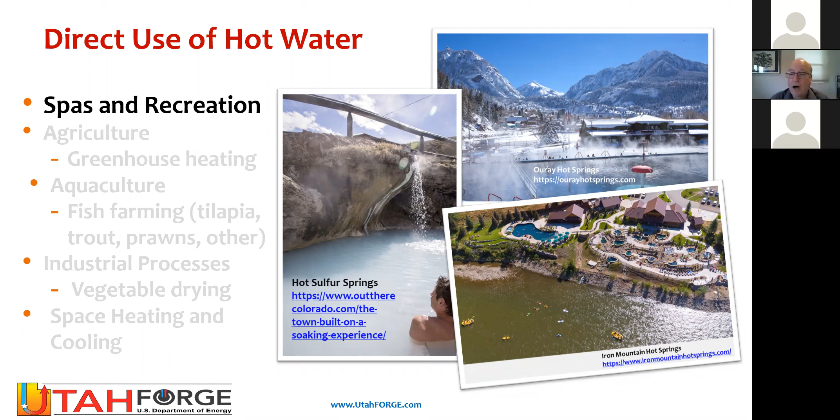Low temperature, we're certainly familiar with direct use of hot water for recreational purposes. Less so, we don't always think of it, but geothermal energy and low temperature water is extensively used for agriculture, for aquaculture, and for industrial processes. As you can see in this particular diagram, we have a greenhouse in southern Utah that grows most of the poinsettias in the United States. It's commonly used for vegetable drying and other processes like that. And if you have a Gucci bag, it may come from an alligator that was raised in a geothermal setting.

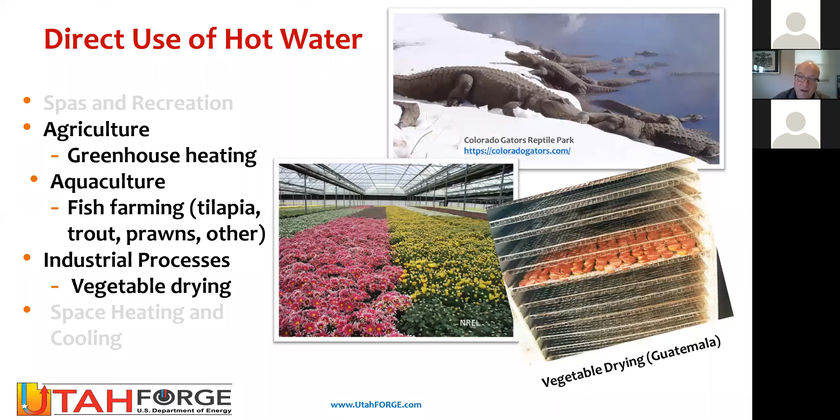The really low-hanging fruit immediately in geothermal is kind of surprising, and it's probably low temperature direct use of geothermal through ground source, where heat is extracted and rejected into the ground in combination with heat pump systems. And as you can see from these statistics here, this is growing extremely rapidly. There's at least 1.5 million units worldwide for heating and cooling, residential and commercial and industrial complexes. And one of the really great examples is in Colorado.

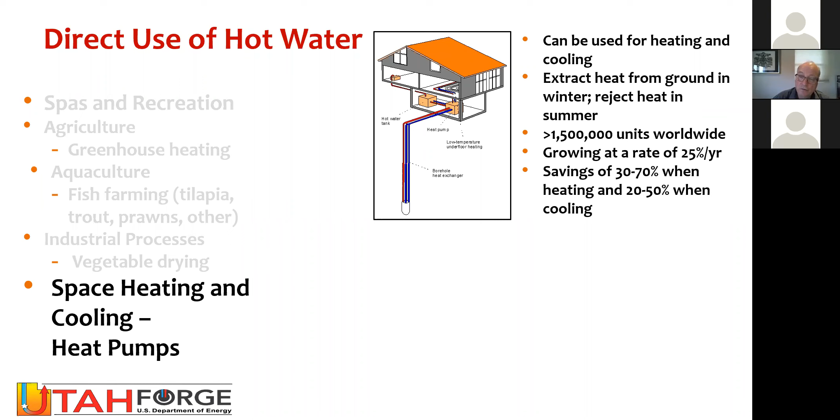Colorado Mesa University has an extensive ground loop where fluid is circulated through a heat exchange system. And in fact, at this university, they have not turned on their boiler in 10 years. And so substantial opportunities for people.

And so what I want to mention is that it's not just hot water and electricity. The low and intermediate temperature geothermal water has extensive applications and utilization for people in the geologic or energy spectrum.

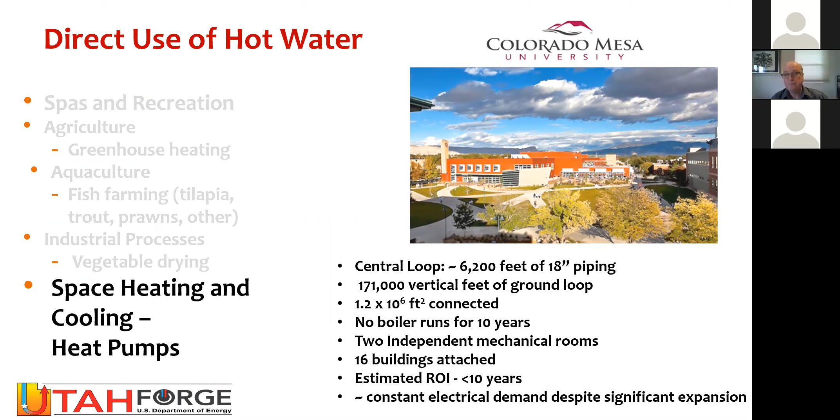We, of course, are more familiar with electrification of geothermal energy, and the advantages of this, of course, are that there are low emissions. It's a 24/7 operation so that you can provide base load power and meet peaking demands in off times. It's nominally renewable and it's vast. It's a low-cost resource once your infrastructure, your wells and your plant are established, and it has a relatively low footprint.

As you can see in the top photograph, which is a picture of PacifiCorp's 38 megawatt electric Blundell power plant in central Utah, you can see the plant in the foreground maybe occupies 5 acres, whereas a comparative wind farm in the background has a much larger footprint in a sense.

So as you can see, I've highlighted 3 geothermal power plants in the state of Utah alone. Those are PacifiCorp's Blundell plant. In the middle, Enel, an Italian company, has the Cove Fort plant, and it produces 25 megawatts of electric. And Cyrq Energy's Thermo plant, also in central Utah, produces about 10 megawatts. So in many places around the world, there are tremendous opportunities for conventional electrification of geothermal energy.

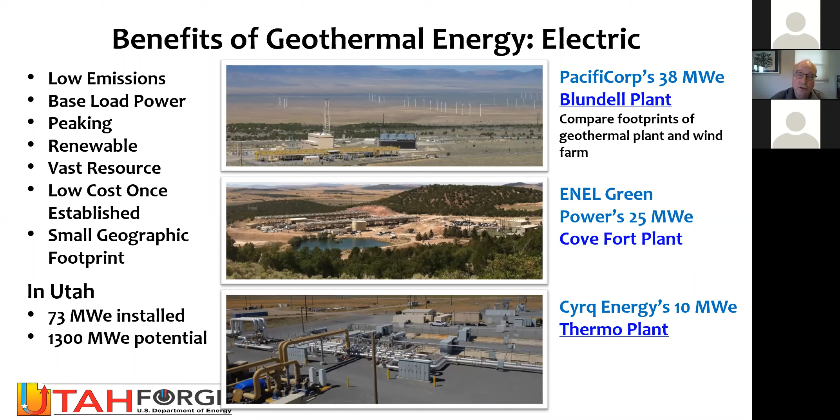Most of these locations for geothermal energy are logically associated with plate boundaries and tectonic environments where, by virtue of plate movement or other tectonic activity, there are sources of heat that are relatively close to the surface that can be accessed by relatively inexpensive drilling.

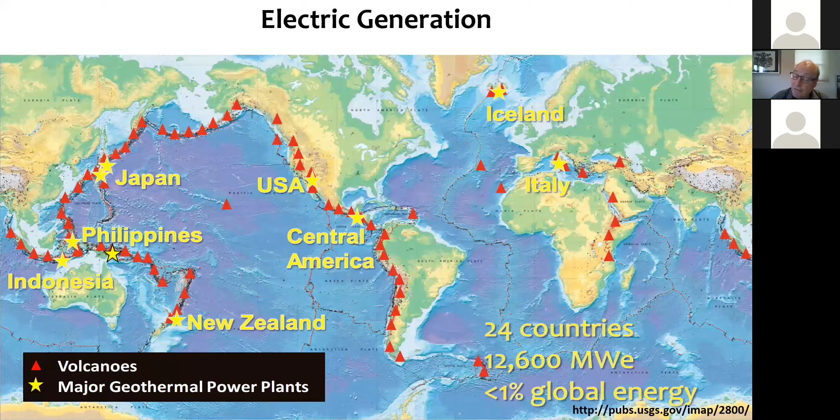And in fact, these conventional hydrothermal geothermal locations have 3 things in common. They have a heat source. As we can see, we have a geothermal reservoir that's proximal to some sort of natural heating source. They have natural fractures, as shown in the fracture at right from an operating plant near Reno, Nevada. And they have in situ heated water that can be convected through these natural fracture systems into a wellbore and to the surface to some sort of a power plant.

So as we can see with the schematic on the left, we have a convecting situation where heated water is moved through natural fractures, and these natural fractures are intersected by relatively shallow open boreholes, or at least partially open boreholes, which produce through the fractures to the surface. They produce steam or hot water, which is either flashed and drives a turbine, or it's run through some sort of an organic Rankine cycle binary power plant where there's a secondary heat extraction and conversion to electricity.

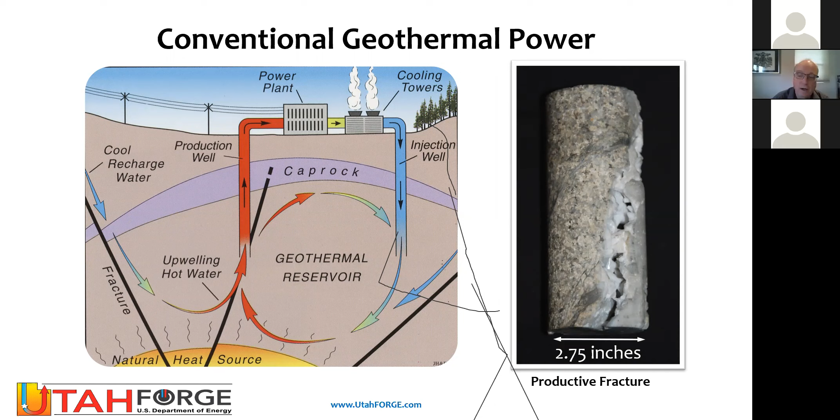So what are the characteristics of these conventional geothermal systems? The characteristics are that we have a large in situ volume of heat, and we also have to produce large volumes of heated water. The message here is that compared with a barrel of oil, which can be combusted to create energy, the energy density of a barrel of water is substantially less. So to create the same amount of energy, you need much more water to run through your power conversion operations.

And this water in these conventional geothermal plants is transferred by convective heat transfer through natural fractures. These extensive systems of natural fractures are high permeability. And there's a few plants that have multiple wells that can produce on the order of what a nuclear plant would do. That's approximately 800 megawatts. The Geysers in particular in California is noteworthy. On average, an average well might produce 6 megawatts of electricity. There are some extremely substantial wells that may produce up to 50 megawatts of electricity.

And just to put that into perspective, let's see what you need in terms of your volumes. So at 392 degrees Fahrenheit, 200 C, and sort of the limit for a binary power plant is maybe 150 degrees C, although more and more those limits are pushed lower. A megawatt from a flow rate of 365 gallons per minute will service maybe 750 to 1,000 homes with the typical demand in the United States. And so 365 gallons a minute is what? That's like 9 barrels a minute. And so it's not too substantial, but it's reasonable.

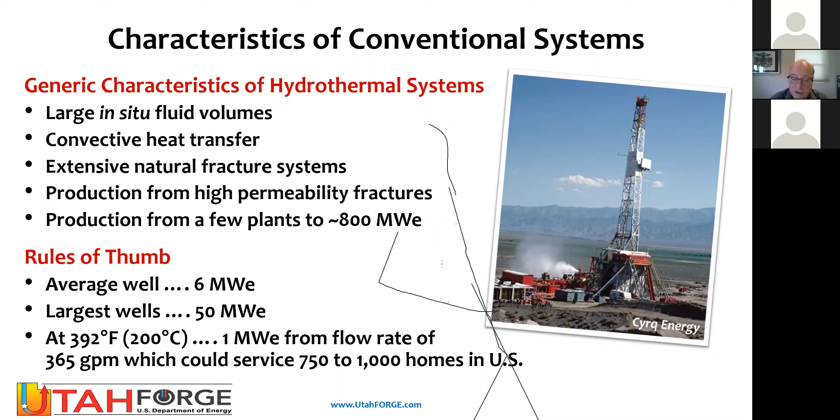And I really don't know why. I don't know whether your screens are seeing it, but I'm seeing some odd lines on the screen that I have here.

So we're getting Zoom bombed or something.

But nevertheless, these conventional geothermal systems, what do they need? They need heat, they need fractures, they need water. Now, this is a difficult combination in much of the continental United States.

And so how can we take geothermal energy and move that geothermal energy to a larger geographic part of the United States? Well, heat, fractures, water. Are there parts of the country where we have some of these? Well, yes, indeed.

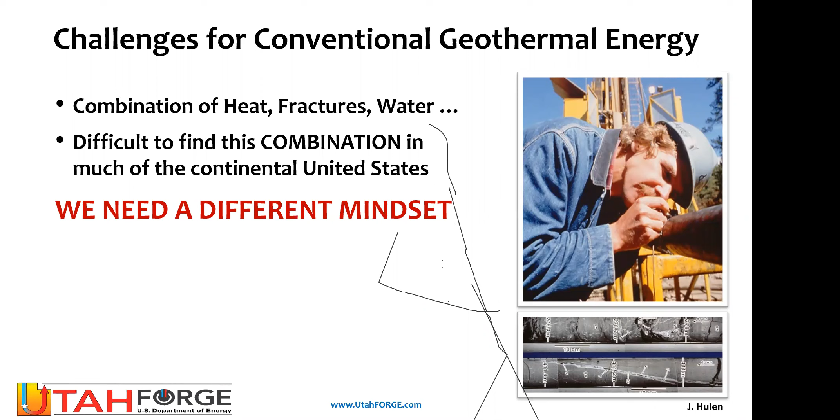And if we take this further and give ourselves the challenge that we want to create the other 2 elements, we have heat, but we want to create fractures and circulate fluid through those fractures, then we can develop what is called an enhanced geothermal system.

This entails drilling an injection well, hydraulically fracturing that injection well, and drilling a production well to intersect those hydraulic fractures so that you've created a heat exchange system where fluid can be pumped down the injection well. It passes through a series of hydraulic fractures, picks up heat, and is produced up to the surface, subsequently flashed to steam to drive a turbine and generators.

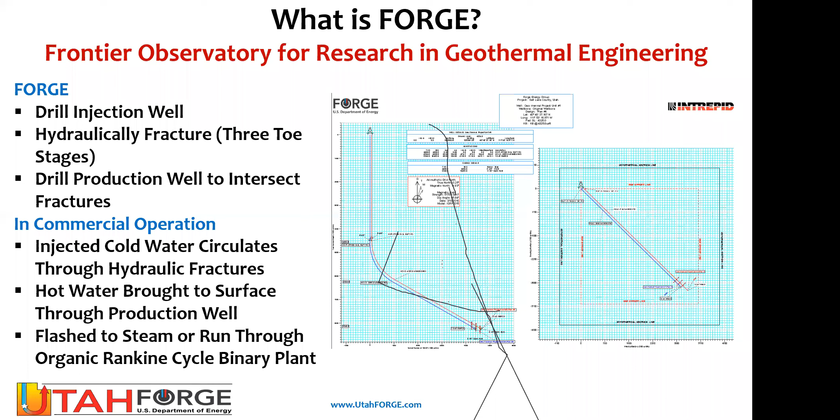Recognizing this and the opportunities associated with it, the Department of Energy, about 5 years ago, conceived of the FORGE program. Initially they developed 5 sites where paper studies were done: a couple in California, one at Fallon, Nevada, one on the Snake River Plateau in Idaho, one at the Newberry Volcano in Oregon, and the Utah program in central Utah. In 2016, this was down selected to 2 locations, Fallon, Nevada, and Milford, Utah.

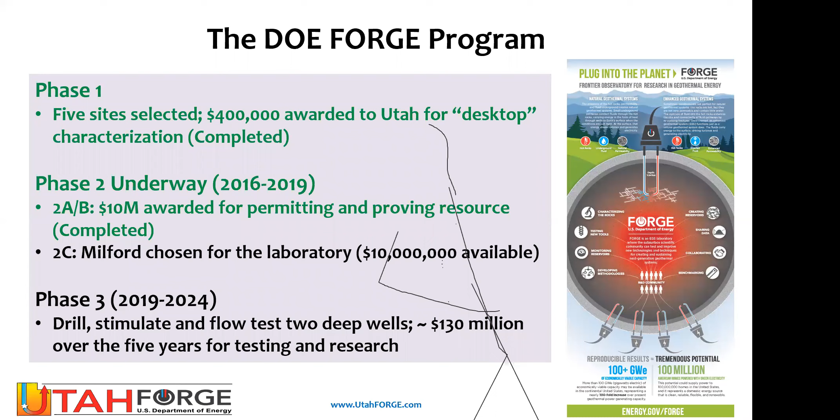Each location drilled a scientific well and established the merits of the individual site for geothermal energy extraction and for a research laboratory. Ultimately this was awarded to the Milford site, and this is $130 million expended over 5 years. That $130 million involves developing the infrastructure and research money that would go to use the unfractured portions of these wellbores for Department of Energy awards to study hydraulic fracturing, logging, isolation methodologies, etc.

So the concepts of FORGE and the criteria for FORGE basically are: you need temperatures greater than 350 degrees Fahrenheit at depths greater than 5,000 feet, but not substantially greater, so that operational expenditures will be minimized. That's definitely a criterion met at the FORGE site in Utah.

These rocks need to be low permeability granite. It needs to be a thermally conductive regime rather than a thermally convective regime, which is associated with conventional geothermal. One of the number one criteria is that there needs to be a low risk from induced seismicity. And this site actually meets those criteria.

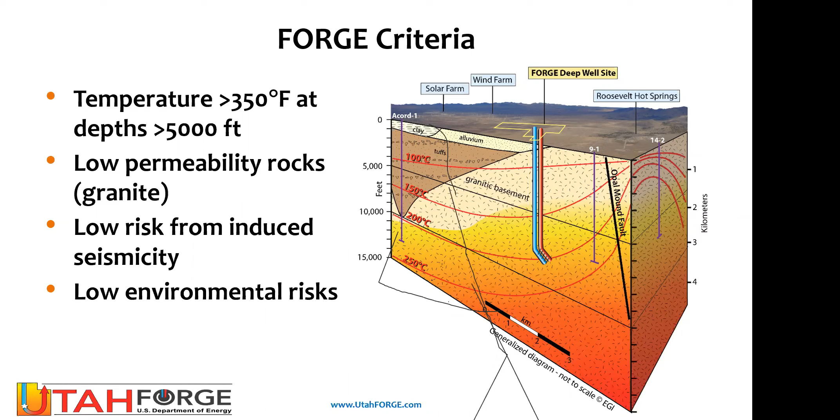It's been monitored by the University of Utah for about 30 years because of potential for earthquakes, and this is a relatively aseismic region that meets the seismic criteria. Low environmental risks are also needed, to minimize any environmental risks associated with surface use and competition with agriculture and other ground use.

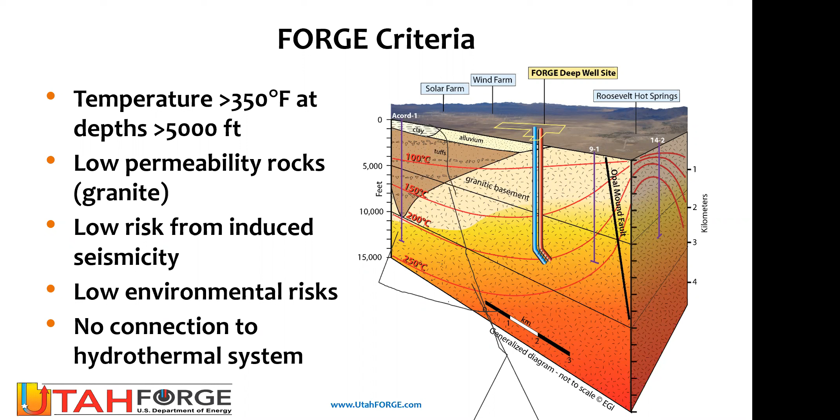As I mentioned earlier, with the thermally conductive situation, there is no connection to a hydrothermal system. And in fact, the location in central Utah shown here met all of those criteria.

The state of Utah likes this location because it falls within what they define as Utah's renewable energy corridor, where in the immediate vicinity there are 3 geothermal fields, a large wind farm, 2 solar fields, and a biogas facility, because nearby there are about 500,000 hogs within about 20 miles being raised primarily by one of our partners, Smithfield Corporation.

The waste from those hogs is used for generating biogas. Immediately around the facility we have 3 plants: Cyrq's thermal plant, the Blundell plant, which is within 4 kilometers of Forge, and relatively close by is Enel's Cove Fort plant. Those plants are hydrothermal, but it turns out the specific geologic regime in our location is a conductive thermal environment.

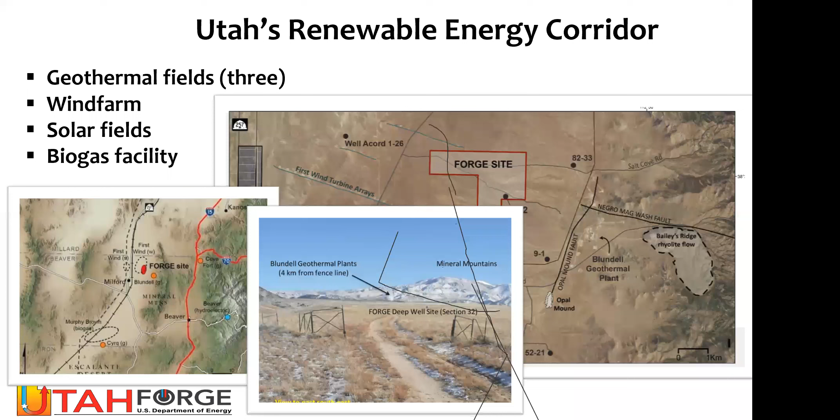As you can see from the location photograph, taken maybe 5 or 6 years ago before any activity, there's relatively little environmental disturbance. We've done NEPA surveys and archaeological surveys, and it turns out from all perspectives this is a very favorable site: no endangered species, no nearby human activity, and the shallow groundwater is non-potable.

Since 2017 we've drilled 3 wells, including 1 vertical scientific well to about 7,500 feet. That was a barefoot completion, with the bottom 200 feet left barefoot, and we carried out a lot of in situ stress measurements in that section. Last year we perforated 2 zones of the well and carried out DFIT and larger scale injection tests to confirm proof of concept for injectivity into these wells.

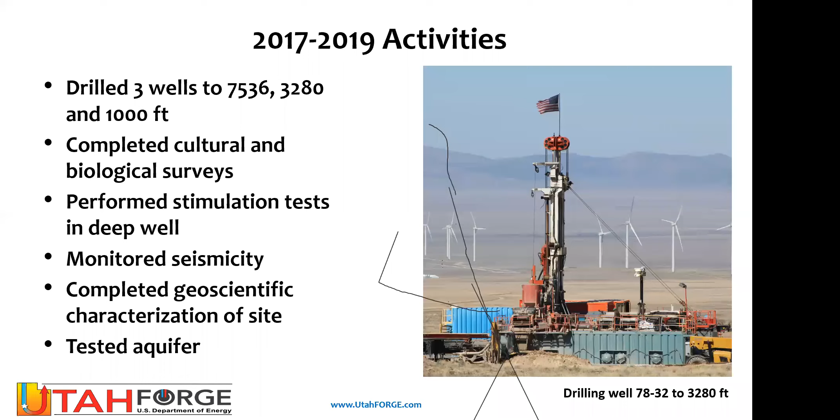Those were the activities in the early years, and now we're proceeding with developing infrastructure and monitoring systems, particularly seismic monitoring systems, not only for hazards but for microseismic monitoring while we're fracturing, so we have some idea of the morphology of the fractures.

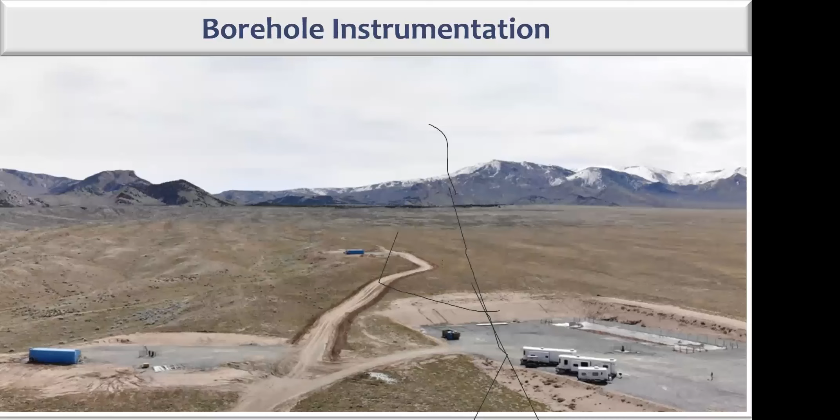This photograph, looking east, shows the situation maybe last May, with one relatively shallow monitoring well with a geophone and an accelerometer at its base, in alluvium. The geologic setting has approximately 3,000 feet of alluvium before the granite contact, derived from erosion of the mountains to the east, shed and deposited above the relatively young granite contact.

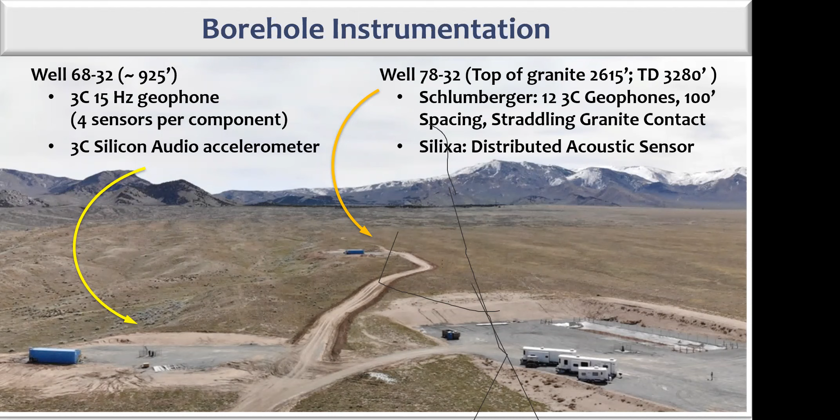So one set of sensors is in the alluvium. The well known as 7832 is drilled into the granite by about 600 feet. This past year we monitored activity with geophones straddling the contact, 1,200 feet of geophones, 12 geophones 100 feet apart, straddling the granite contact. In this well's annulus we had distributed acoustic sensors cemented in the backside.

The primary well we've been working on for the last 2 years is designated 5832. It was drilled to a depth of 7,536 feet. We will use this as a monitoring well going forward. The temperature at 7,500 feet in this well is about 200 degrees centigrade.

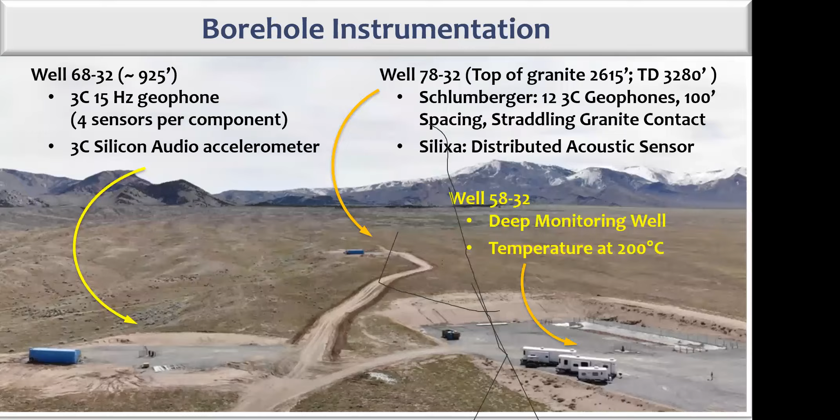In the immediate future we're developing drilling plans to drill the 2 horizontal wells I've talked about. The first well, designated 16A 7832, will be drilled vertically, then at a 65-degree tangent just south of east at 65 degrees to the vertical, bypassing the 7,500-foot deep well, 5832.

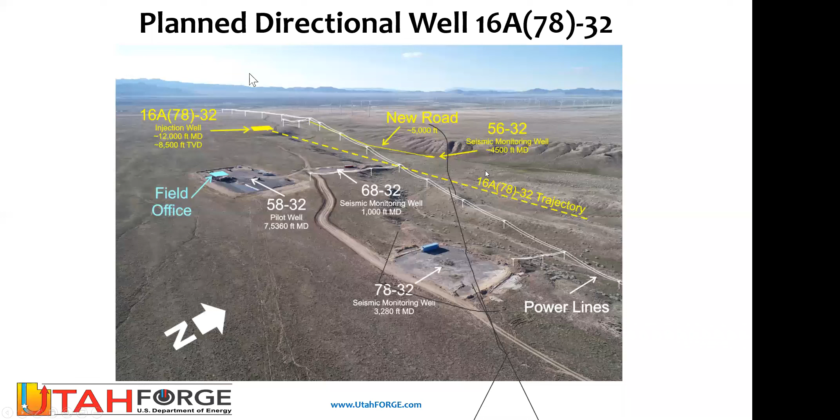It's relatively proximal to the seismic monitoring well 7832 and close to the shallow well 6832. In the very near future we're drilling a second monitoring well, 5632, which will go to a depth of about 4,500 feet.

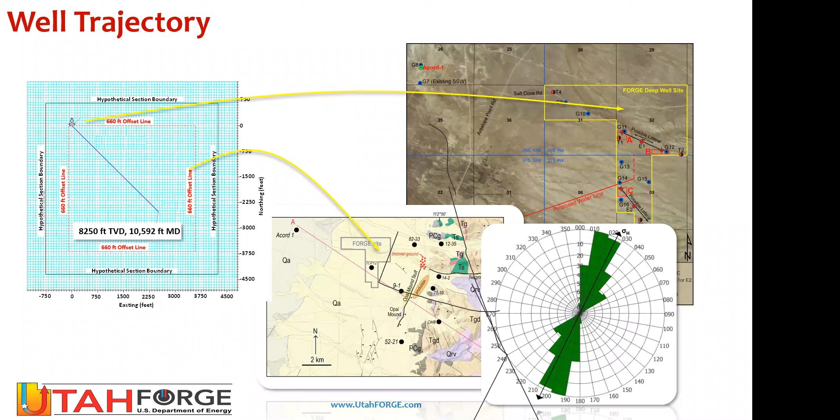The directionality of this well is geologically dictated so that its trajectory is perpendicular to the maximum principal stress, consistent with hydraulic fracturing experience, drilling so that fractures propagate orthogonal to the well. This is based on geologic mapping and insights over the past 15 or 20 years, in a range extensional setting, and on an FMI log where drilling-induced fractures are shown on the Rose diagram at bottom right. We will drill perpendicular to the trends of the maximum principal stress.

So it sounds pretty straightforward. Well, the problem with this is that people have been trying to do this for 50 years.

It started with the Fenton Hill experiment in Los Alamos, New Mexico, which was a scientific success. It went on to Rosemanowes in Cornwall, Soultz-sous-Forêts in France, which is actually generating a small amount of power, experiments done in the Cooper Basin, and recent experiments done in Pohang, Korea.

So there are some obvious technical challenges that DOE has identified because of the difficulties encountered over the last 50-odd years where people have been working on enhanced geothermal systems. The opportunities we have now are exploiting directional drilling, hydraulic fracturing, and isolation technologies that have been adapted from the oil field to do this.

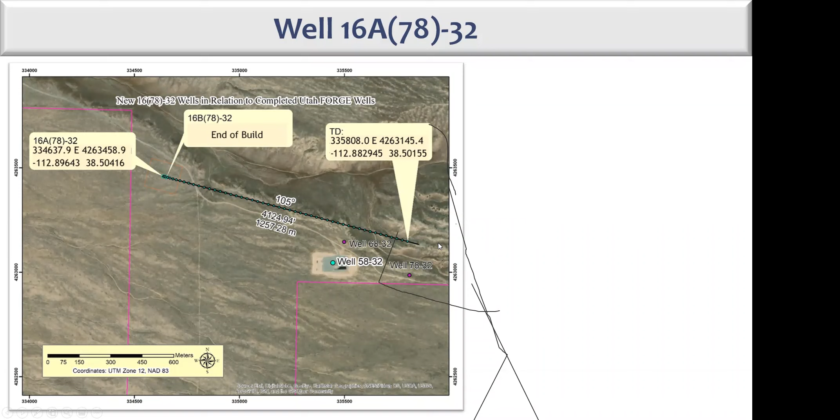So we will drill the first horizontal well, probably starting in about July this year, starting from the west, drilling to the east, orthogonal to the anticipated direction of maximum principal stress. This is a cross-section of what the well will look like. It's drilled down to a depth, and we're drilling at 65 degrees.

65 degrees is a depth where we may still be able to run wireline logs on bogies without having to tubing convey them. We'll see. And that's why the 65-degree depth was selected rather than an even greater inclination from the vertical.

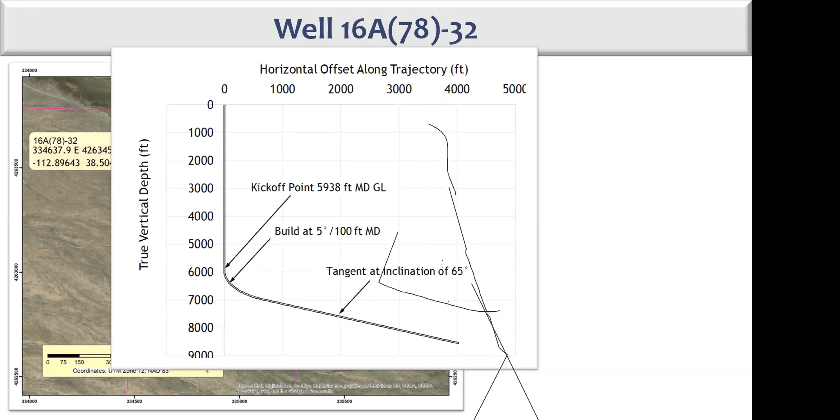There's a lot of completions discussion on this well, just because of the temperatures involved and the potential multiplicity of service conditions that this well can see. Originally it will serve as an injector, but after both wells are in place and connected, there is a possibility that circulation could come from the second well into the first. So you have to design the expansion and contraction of the pipe to take that into account.

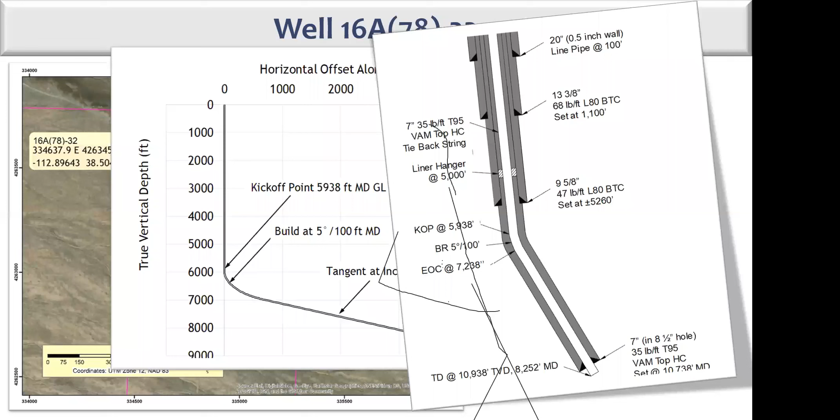And this is why there will be a liner hanger and cemented liner, 7-inch liner below the hanger, and cemented 7-inch tieback above the liner. So relatively, it's a standard oil field completion, but adapted to a geothermal environment. The upcoming activities will be that we will drill and steer 2 highly deviated wells.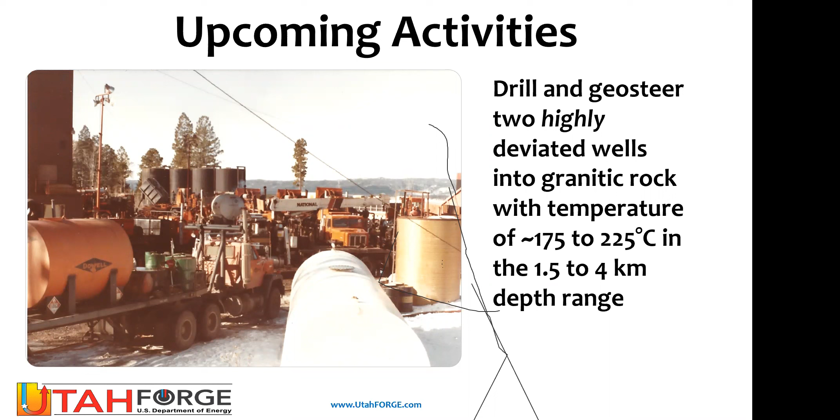So there's still lessons to learn, but the principle of Forge is that we will drill the first production well. We will create 3 moderate-sized fractures right at the toe of this well, probably using slick water, possibly using lower rate injection in one of the stages, and possibly using a large cool-down pad and a cross-link fluid in one stage. That's yet to be decided.

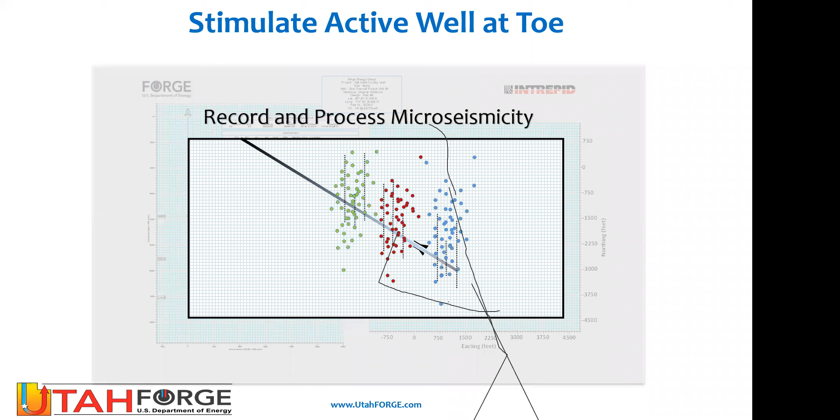That's down the line. We will monitor the microseismicity of these wells and drill into the cloud, and hopefully we will have intersection with the fractures. If not, there'll have to be remedial work on both wells to create the interconnection. So you have 2 wells that are interconnected, and you've established this interconnection between them.

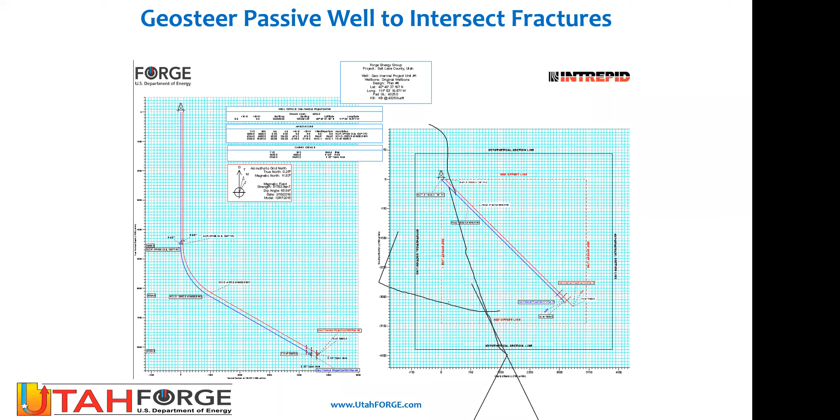What that leaves is the rest of this real estate along the length of this well for the Department of Energy to issue solicitations for people to use these wells as a field laboratory, testing out hydraulic fracturing technologies, monitoring systems, packers, and other isolation systems. So there are a lot of technical challenges associated with this type of situation.

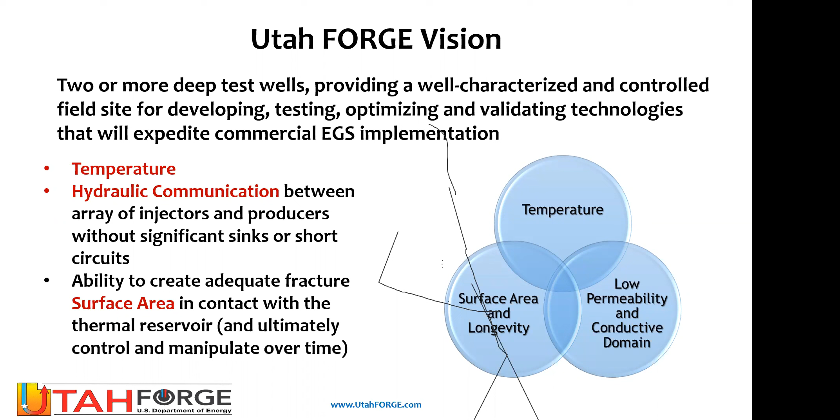And the situation is well demonstrated by this Venn diagram that was conceived by Bill Dershowitz from Golder, that these enhanced geothermal systems are an intersection of temperature, an ideal surface area situation, and a low permeability conductive regime. And to get that, you have to face some challenges, and the temperature challenges are high temperature. That high temperature definitely affects your drilling and your completion technologies.

Drilling in these granitic wells has historically been extremely slow. People have felt happy when they've been drilling 10 feet an hour through these granites, bits lasting 40 hours. And so one of the real challenges with these operations is improving drilling technologies by bit selection, improved motor performance at higher temperatures, and definitely application of technologies such as mechanical specific energy.

Logging, same issues, is that conveyance is going to be an issue. Ideally, we can run these wells on bogies or possibly on tractors, but they may have to be tubing conveyed. Through tubing logging is available. And so ultimately also thermal management and making sure that the depletion lasts over the amortized life of these wells, which for geothermal, unlike oil and gas, it's a 30-year amortization period that is required.

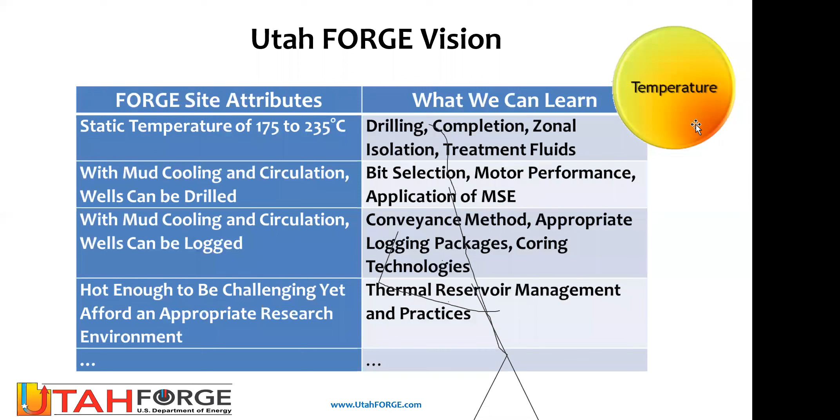And so drilling, huge challenges. You can see a tricone that was used and the wear on this tricone bit. And what we're really trying to do is introduce concepts from the oil and gas industry that were based on mechanical specific energy, looking at optimizing the amount of energy that is expended at the bit. So this is going to be a real opportunity in these particular wells.

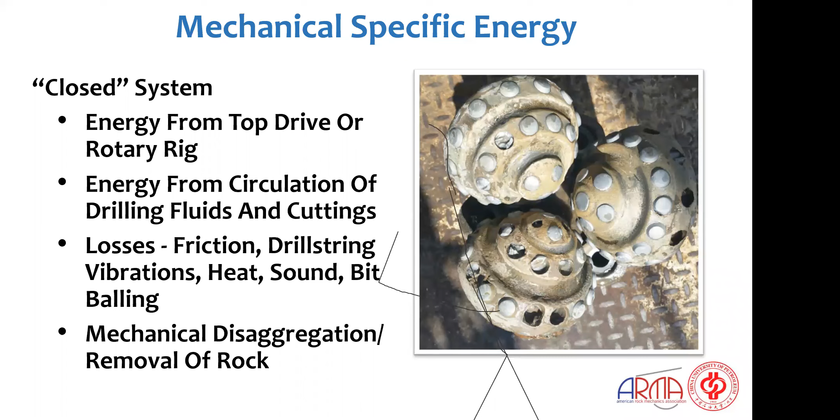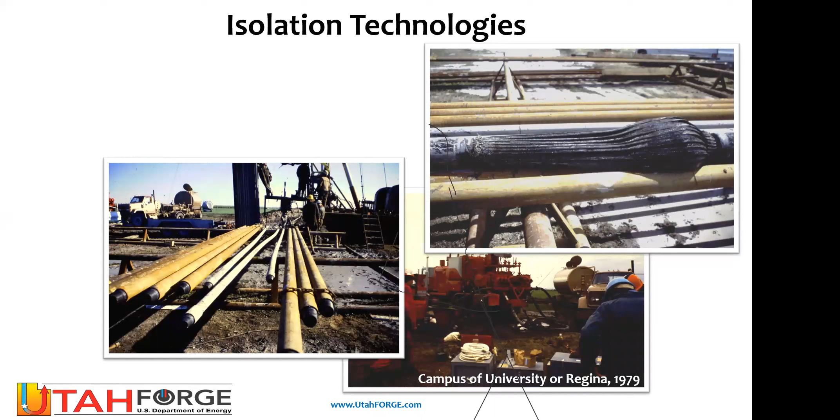We're also interested in isolation technologies. These high temperatures and relatively high pressures to break down these granitic formations require very, very stout isolation technologies. This is a picture in the upper right of an inflatable packer that failed. That probably failed right about at operational conditions, possibly right near operational conditions. But what we've experienced at the Forge site is we've experienced mechanical packers failing much below operational conditions.

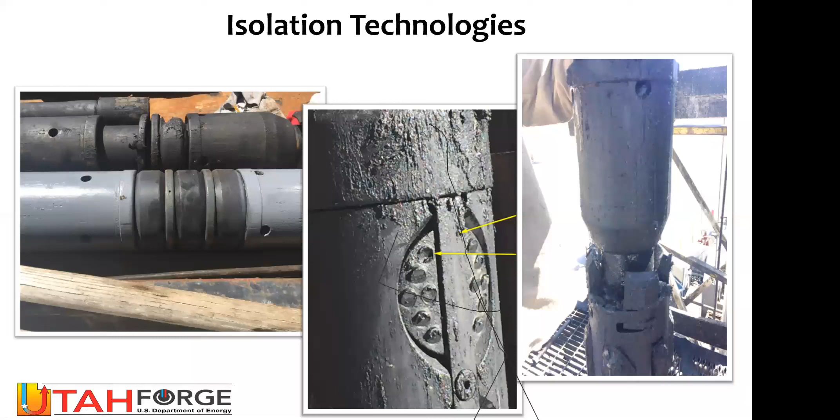So what you can see is packer rubbers in the left-hand photograph. Here is a virgin packer, and here is one that failed much below advertised specifications for the packer. Not only the rubbers, but also the dogs and the slips have failed in these packers. And here's actually a picture of the rubber coming out of the hole. So you have to be able to isolate in these situations, because you have to be able to create multiple hydraulic fractures. And so isolation technology is a big area of research that is prompted by the high temperature environment.

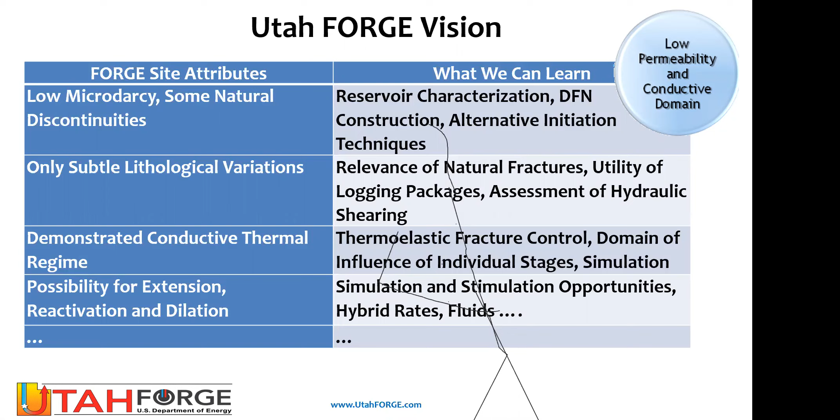The other requirement is that significant reservoir characterization is required, because even though it is a conductive regime, there are a multiplicity of natural fractures that are present. So extensive identification of these natural fractures and modeling these natural fractures, there's significant opportunities for modeling discrete natural fracture networks with sophisticated porothermoelastic considerations. You can ask yourself many geomechanical questions in these.

What kind of fracture systems am I creating? You know, some of the incipient natural fractures are not preferentially oriented. So are they going to propagate in shear? Are they going to self-propagate? Or do they ultimately become effective wing cracks, as shown here? Very good work done by Ghassemi at University of Oklahoma and his students in terms of understanding this. So with the monitoring and the experiments going on in this well, there'll be possibility to identify fracture propagation mechanisms, numerical modeling.

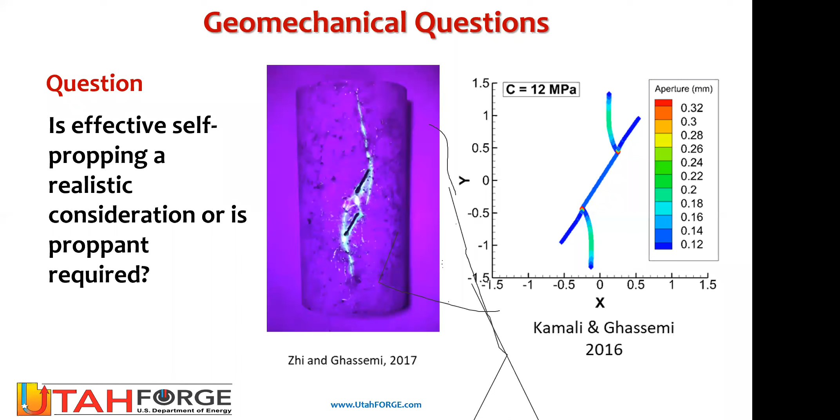We've carried out a lot of injection tests on these particular wells, and we've looked at a number of things in terms of trying to understand DFIT technologies and actually trying to replace DFIT technologies with some flowback technologies that have been talked about by people from SINTEF and certainly by Savitski and Dudley at Shell, where flowback offers the opportunity to do a stress measurement program in a couple of hours as compared to maybe 21, 25 hours that we had to let this shut in for a DFIT measurement.

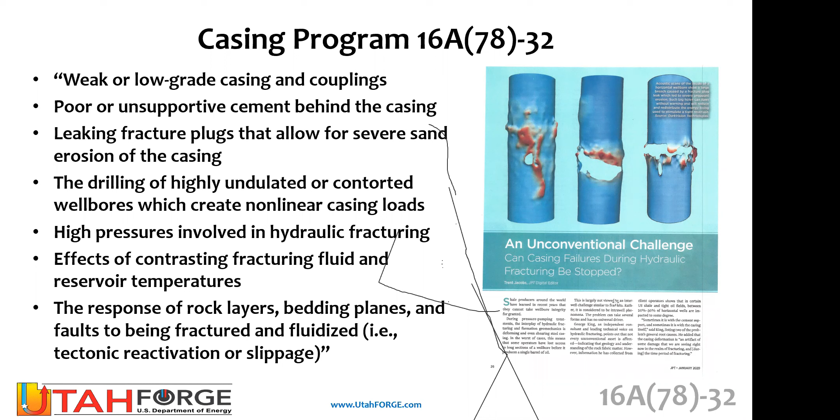So this is a situation where we have the opportunity to test out geomechanical concepts, measurement concepts, stimulation concepts, and we're adapting petroleum engineering technology, and we're very, very conscious of what people have learned in the petroleum industry, and particularly lately in terms of designing our completions, where there's a real sense now in the petroleum industry of the difficulties that have occurred with poor cement jobs. And so we're really trying to pay a lot of attention in terms of designing these wells and implementing cementing and completion technology.

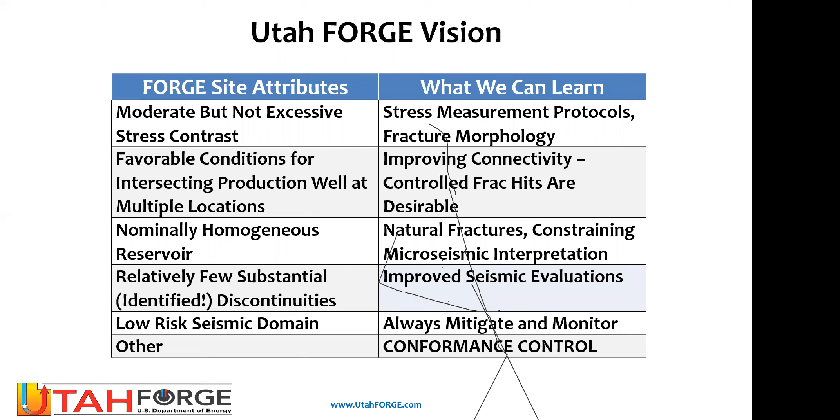So I think I've basically talked about this, but bottom line from all of these learnings is that one of the things that we're very, very interested in is developing methods for conformance control. Because you have N fractures along the length of this well, how do you control where the fluids go into these fractures? And so that is a big deal.

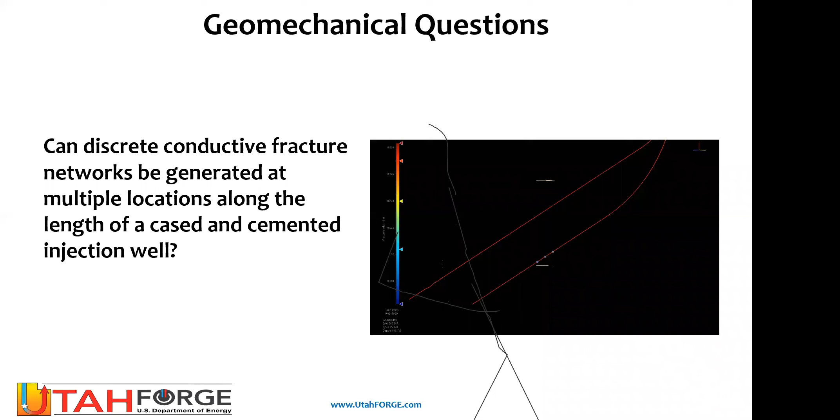So geothermal questions, geomechanical questions: you want to know whether you can create discrete conductive fracture networks at multiple locations. That's one of the #1 geomechanical questions. You do not want short circuiting. You do not want substantial interaction between these two fracture systems. Secondly, can these conductive fracture networks propagate independently? And as I mentioned, avoiding substantial interaction between the fracture systems, interconnections that minimize the surface area that you encounter.

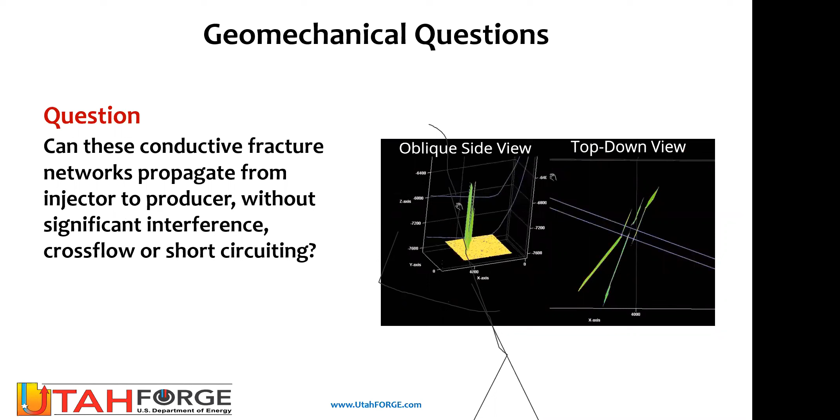So technical geothermal questions. Always in the back of our mind, though, is induced seismicity and creating seismic events that are undesirable. So safe operations are the #1 primary concern, watching for hazards, seismic hazards. We will use the acoustic active and passive events to comprehend the reservoir and the fracture morphology, but we're conscious of induced seismicity. One of the real examples for this is Basel in 2006, where they weren't extremely large seismic events, but they brought to mind the events that occurred in Basel in 1356, where the entire city was destroyed by, I think it was in excess of a magnitude 6 earthquake.

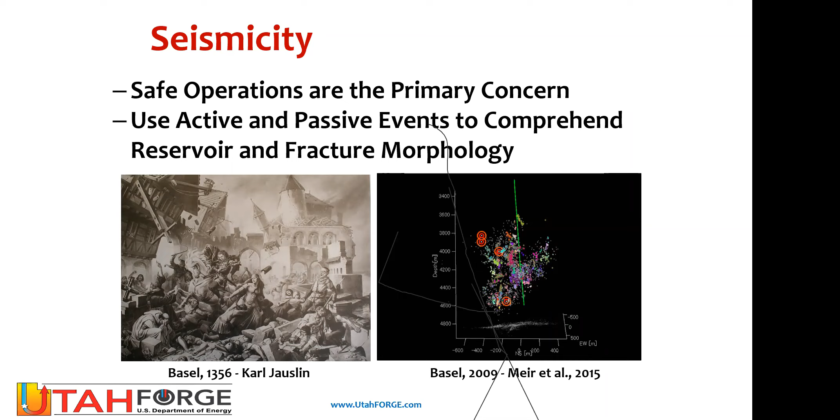And so in situations where you have the potential for shear motion, you have the potential for seismicity. This energy expended during hydraulic fracturing is always consistent with some level of microseismicity. The challenge is to mitigate this and to find geologic regimes where it is acceptable.

The second and final engineering challenge, as I wrap up here, is controlling the flow through these fractures. This may be the greatest challenge that we have. So we can see this schematic flow here showing nicely through a fracture, beautifully intersecting a production well, that you flow fluid through a fracture system. You extract heat convectively, conductively into the flowing fluid. It's produced out the producing well and goes to the surface to produce electricity.

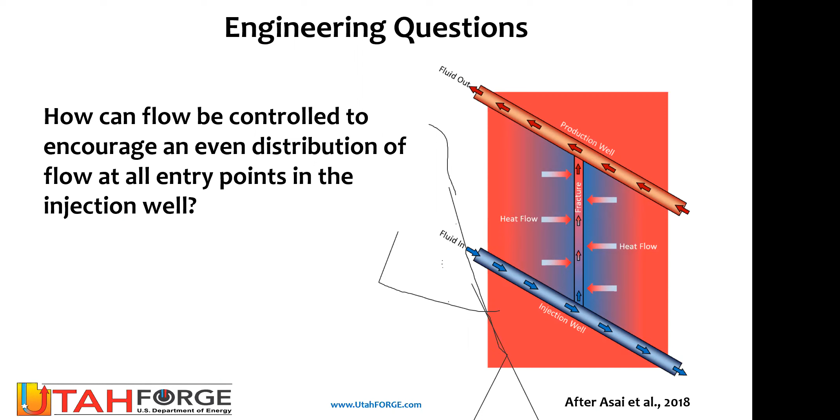But let's take another schematic and let's look at this from the point of view where you have multiple fractures existing in your system. What happens in a system where you're injecting, where there's a multiplicity of fractures? Well, the situation is that dominantly, just strictly on the basis of fluid mechanics and viscous losses that are going to occur in these fractures, preferentially the fluid will go through the first fracture that it sees.

And unfortunately, in geothermal situations, it's catalytic, because as I flow fluid through that fracture system, at least part of that fracture system will be cooled. And as that fracture system is cooled, thermoelastic coupling causes an increase in aperture of that system, and preferentially more and more fluid will flow through. So one of the real challenges is mechanical control of fracture systems or chemical control through diversion of one form or another.

And so to conclude, this is a tremendous opportunity for the geothermal community, for the geomechanical community, for the oil and gas community to look at exploration technologies, characterizing reservoirs, reducing drilling costs, and all sorts of things that are indicated on this list. So a fantastic opportunity that the DOE has envisioned and put into place.

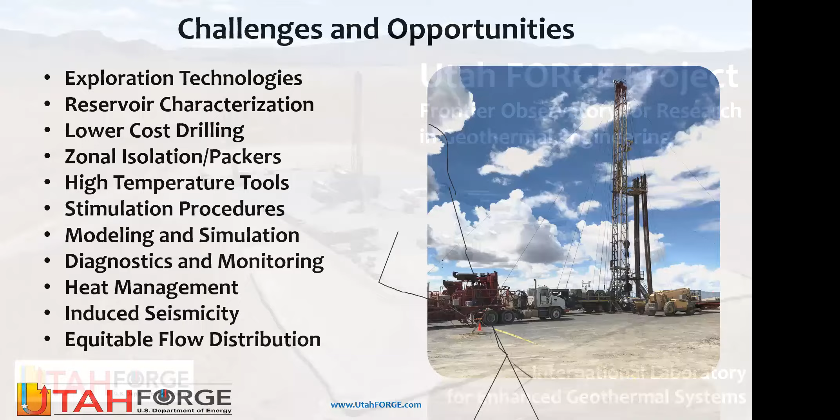Thank you very much. This is Alan. Can you hear me? Yes.

That was an outstanding presentation. We have a number of questions here. Since I'm the moderator, I'm going to stick mine in first. I'm not an expert in this area. Besides using the Silixa distributed acoustic sensing fiber, which is, I think, a great idea, you're getting to temperatures here over 200 degrees C. Are the geophones getting close to their temperature limit?

Well, I'm not a specialist in this area, and maybe there's somebody tuned in that is, but when we run them in the future, we'll keep them below 150 degrees C for medium-term installations. What that'll mean is in the vertical deep observation well, we've fractured up to about 6,500 feet. We'll install a bridge plug above that depth, and when we run geophones in that well, we'll keep them below 150 degrees C. So indeed, you're right.

I believe there are some technologies that can handle higher temperatures for a shorter period of time, but I would have to defer to my colleagues on that. Yeah, you can get up to about 200, and then you don't have that limitation to an extent with the fiber. Some of the other questions from the audience. Here's one: have you looked at flow control devices applications for flow conformance?

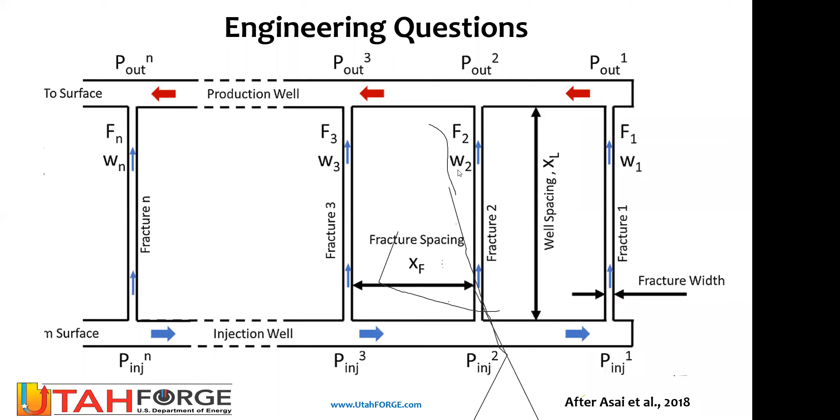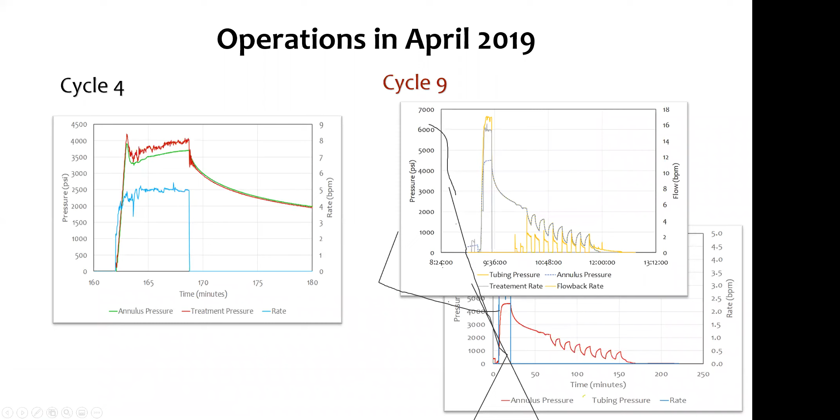Well, let me just go back to this FMI one, if I can find it. We had extremely good success with the logging operations. Now, in fact, we were lucky in this well that the static bottom hole temperature of the well was 200 degrees C. But when you drill these wells, you're running mud chillers. We continuously ran mud chillers. And so the bottom hole temperature when we actually ran the logging was about 175 degrees C.

Now, in one recent campaign, we fractured the toe of the well and we ran an FMI. By the time we finished the FMI, the temperature was high enough that we decided that we couldn't run a UBI, which was unfortunate. So temperature is a real issue. We're really looking forward to the logging operations in these deeper, hotter wells, because they'll be even hotter. The static temperature at the toe is about 235 degrees C.

So we had good luck with the FMI. I suspect you'll have good luck with the acoustic tools. We ran a DSI that worked extremely well, but the temperature was cool enough. One of the problems that we encounter is that our level of experience in interpreting triple combo data in a geothermal and a granitic setting is maybe less, at least from my perspective, than what it is in a sedimentary sequence. And so we had great luck with the wells.